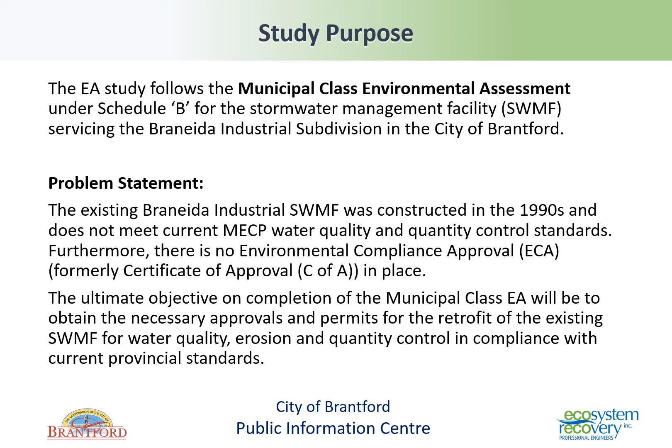The Municipal Class EA process provides opportunities for public and stakeholder involvement throughout the project, ensures that all reasonable alternatives are considered, and that a selected alternative would have minimal impact on the surrounding environment. The Braneida Stormwater Management Facility Proposed Retrofits EA study is being undertaken as a Schedule B Class EA project.

After we receive public feedback and integrate it into the evaluation of alternatives, we will confirm the preferred solution. Once the preferred solution has been confirmed, the project file report and notice of completion will be issued for a 30-day public consultation and review period.

The information shown on this slide provides the key details for characterizing site geometry, geotechnical, natural heritage, archaeological, built heritage, social, and geomorphological background conditions. The site geometry consists of a general description of the subject lands. The study area spans over 140 hectares of mixed industrial development. The stormwater management facility site consists of approximately 2.4 hectares. The outlet channel of the stormwater management facility is a 500-meter long tributary to Fairchild Creek.

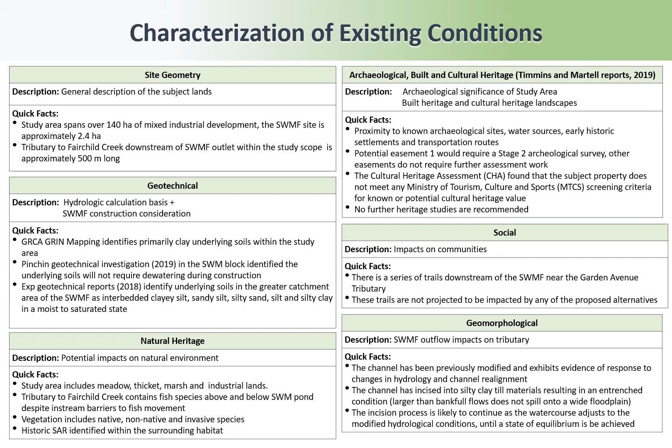This slide contains photos demonstrating some key features of the existing conditions on the subject lands. Photo 1 shows the outlet structure of the stormwater management facility.

This structure is intended to allow low flows to exit the facility via two smaller holes cut into the concrete weir wall. As you can see, those smaller holes have become clogged with sediment and debris, and the pictured concrete weir is providing outflow control for the facility. This has reduced the active storage volume of the facility by 13,700 cubic meters.

Photo 2 shows the twin 2-meter diameter culverts downstream of the stormwater management facility outlet.

Photo 3 shows the tributary to Fairchild Creek, approximately 300 meters downstream of the stormwater management facility outlet. Bank erosion can be seen on either side of the channel with exposed roots and channel incision.

Photo 4 shows an indication of active bank erosion in the channel. There is a lack of rooting depth and exposed clay at the toe of the bank. Photo 5 shows the extent of the study area.

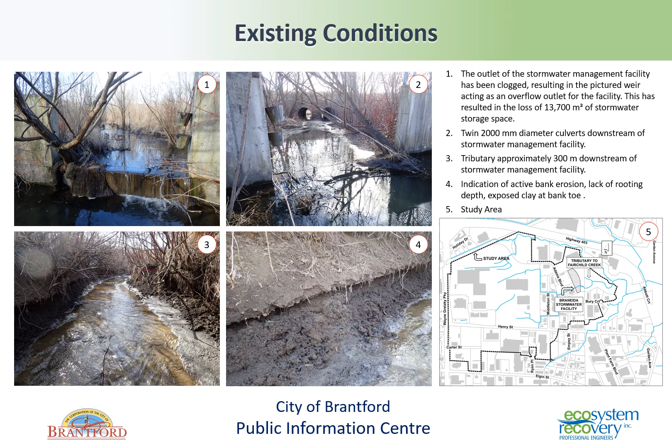This slide shows the 5 potential easement locations that were considered to provide access to the stormwater management facility for construction and maintenance activities. The locations considered were Alternative 1, 132 Adams Boulevard; Alternative 2, 112 Adams Boulevard; Alternative 3, 90 Adams Boulevard; Alternative 4, 66 Adams Boulevard; and Alternative 5, 66 Adams Boulevard from Bury Court.

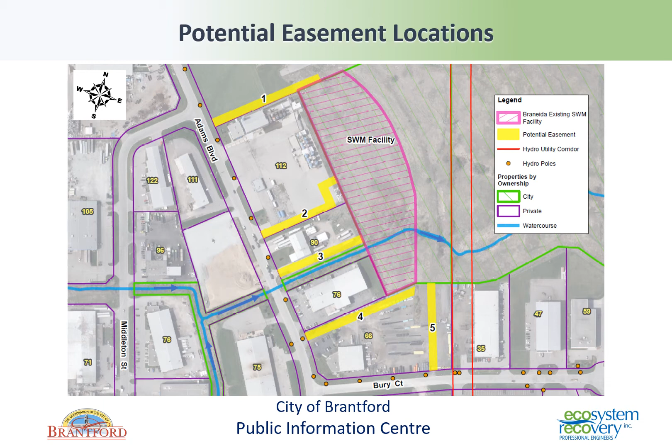This slide shows the alternative evaluation for each of the potential easement locations. The criteria used to evaluate the alternatives were land use, which evaluates the potential damage to existing property, potential impact on the day-to-day operations of nearby businesses, and the presence of utilities and overhead power lines.

Natural environment, which evaluates the potential impact to terrestrial and aquatic environment, including habitat and tree removal. Design requirements, which evaluates the proximity to the stormwater management facility, ease of grade transition to the stormwater management facility, and the opportunity to coordinate access for future stream rehabilitation works within the downstream tributary.

Willing host: the City of Brantford conducted background work to determine which of the easements is preferred based on the willingness of landowners to agree to an access easement on their lands. Based on a relative scoring exercise, the preferred easement location is Alternative 3, 90 Adams Boulevard.

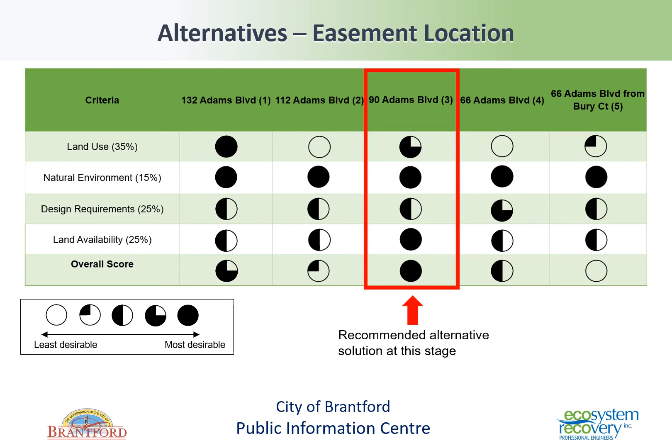3 alternatives were generated for the stormwater management facility. Alternative 1, do nothing. A do-nothing alternative is provided to use as a basis of comparison between the other alternatives. This alternative proposes that the facility is left as is and no remediation or rehabilitation works are completed.

Alternative 2, retrofit the stormwater management facility within the existing property boundaries. This alternative involves a redesigned stormwater management facility within the existing location, providing a permanent pool for water quality treatment and a multi-stage outlet to provide erosion and quantity control.

A forebay will be constructed for ease of long-term maintenance, and the separation of inlet and outlet structures will increase the flow path and detention time within the facility to further improve water quality treatment.

Alternative 3, retrofit stormwater management facility within expanded stormwater management facility property boundaries. This alternative will have the same design criteria as Alternative 2, but will only be used if stormwater management design calculations indicate that additional detention storage volumes are needed.

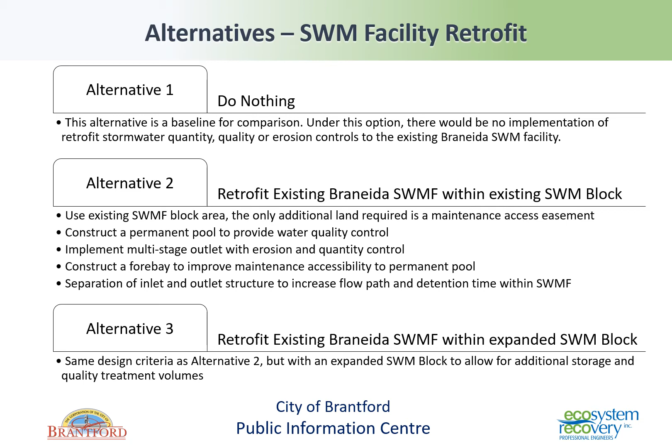If extra storage volumes are required for water quality treatment, the stormwater management property block will be expanded to the required size to accommodate the required level of water quality treatment.

This figure shows the existing boundaries and flow paths of the stormwater management facility.

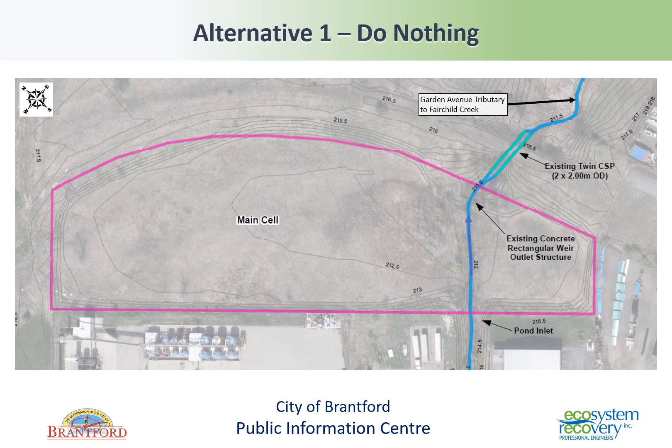This figure shows a conceptual design for a pond retrofit, including a forebay and permanent pool providing water quality treatment, along with a general flow path of water through the facility.

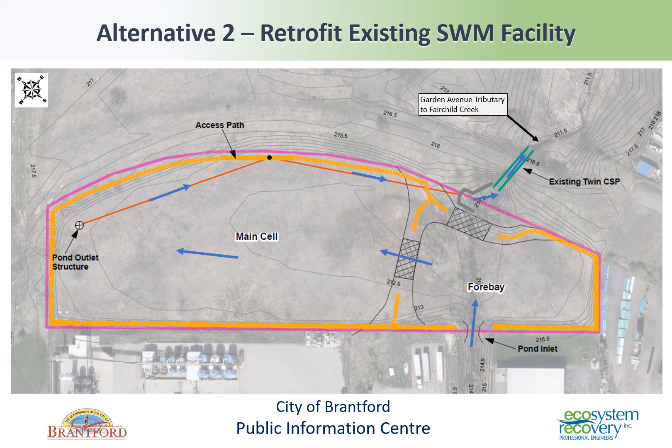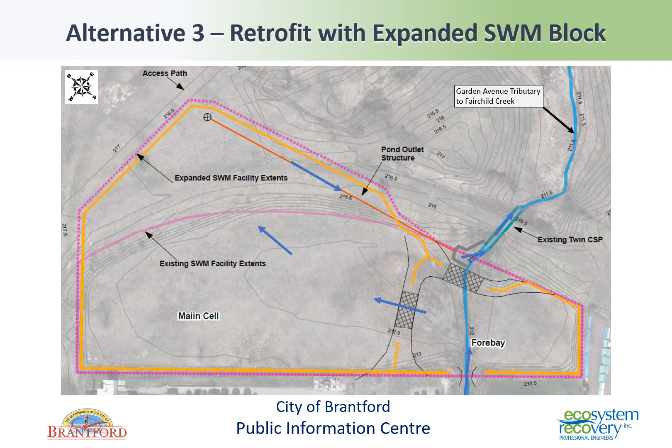Each of the proposed alternatives were evaluated for the following criteria: public health and safety, which evaluates the potential for protection of residents and adjacent landowners from flooding; technical, which evaluates the ability of the facility to provide adequate water quality treatment, quantity control, and erosion protection; environmental, which evaluates the impact on vegetation, fish habitat, and terrestrial habitat; and heritage and archaeological resources, which evaluates the potential disturbance to heritage and archaeological resources.

Socioeconomic, which evaluates impacts from construction activities, property requirements, and potential to integrate trails or enhance a multi-use trail network. Construction cost evaluates the capital costs of construction as well as long-term operation and maintenance cost considerations. Constructability evaluates the ability to implement the facility design, impacts on existing utilities, and the extent and accessibility of maintenance requirements for the design.

Based on the relative scoring exercise, the preferred alternative is Alternative 2: retrofit the existing stormwater management facility within the existing property boundaries.

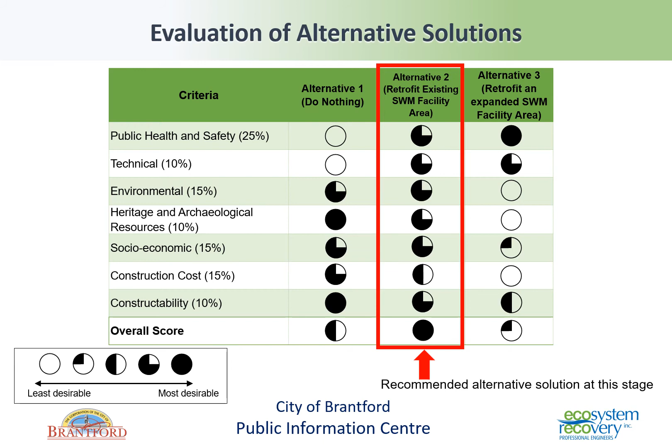4 alternatives were generated for the channel remediation of the tributary to Fairchild Creek, which receives drainage from the stormwater management facility. Alternative 1, do nothing. A do nothing alternative is provided to use as a basis of comparison between the other alternatives. This alternative proposes that the creek remains in existing conditions and no remediation or rehabilitation works are completed.

Alternative 2, channel bed and profile enhancements. This alternative maintains the existing channel footprint and addresses sensitive areas of the channel. Protection of the clay channel bed through the placement of stone will prevent further incision and upstream migration of vertical drops within the channel. This alternative will not completely halt ongoing channel bed incision or widening.

Alternative 3, channel capacity and floodplain connectivity. This alternative alters the cross-sectional configuration to include floodplain access for larger runoff events, reducing the stress on the channel bed. This alternative requires a larger construction footprint and impact to provide overbank storage for higher flow runoff events, and the amount of environmental disruption is relatively higher than Alternative 2.

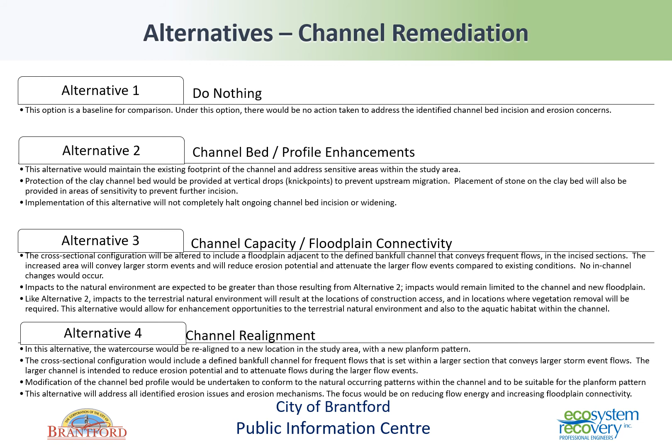Alternative 4, channel realignment. In this alternative, the watercourse would be realigned to a new location within the study area with a new planform pattern. The channel bed and cross-sectional configuration would be altered to enable the concepts described in Alternatives 2 and 3, though to a larger extent, to address all erosion issues and mechanisms comprehensively. The focus would be to reduce flow energy and increase floodplain connectivity within the watercourse.

Each of the proposed alternatives were evaluated for the following criteria: technical, which evaluates the ability of the watercourse to be protected from erosion and the impacts of river stability and flood risk; and environmental, which evaluates the impact on vegetation, fish habitat, and terrestrial habitat.

Socioeconomic, which evaluates impacts from the construction activities and property requirements. Construction cost evaluates the capital cost of construction as well as long-term operation and maintenance cost considerations. Constructability evaluates the ability to implement the watercourse rehabilitation, impacts on existing utilities, and the extent and accessibility of maintenance requirements for the design.

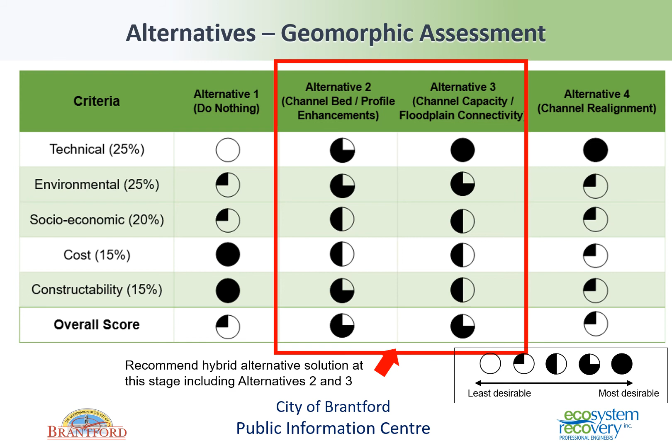Based on the relative scoring exercise, the preferred alternatives are a combination of Alternative 2 and Alternative 3. This hybrid alternative proposes channel modifications focusing primarily on enhancing the channel form to manage flow energy through channel widening and providing stability through channel bed enhancements.

This slide illustrates the location and extents of creek rehabilitation. The highlighted stretch of creek is the location that demonstrates the need for implementation of the preferred alternative. Upstream sections of the creek will not require rehabilitation at this time.

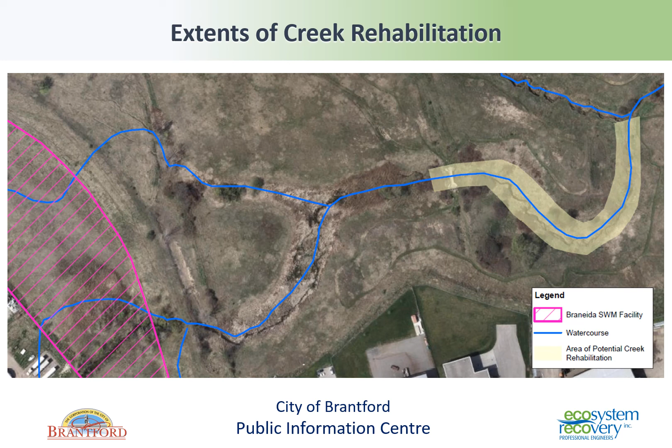Upon completion of the PIC review period, the following steps will take place: finalization of the preferred alternative design considering public feedback, completion of the project file report, issuance of the notice of completion and a 30-day public review period, and detailed design, tendering, and construction.